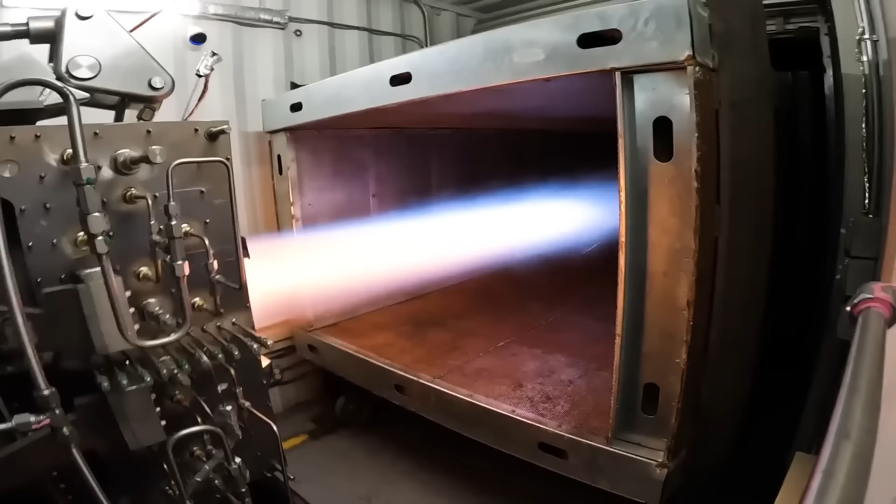Hello, is that a working turbo ramjet engine? You have my attention. So I reached back out to Hermeus to take a behind-the-scenes look at what they're building, and honestly, I was blown away by a company that any aeronautical engineer would dream to work for. What I saw and heard changed me from a skeptic to an optimistic fan of the company.

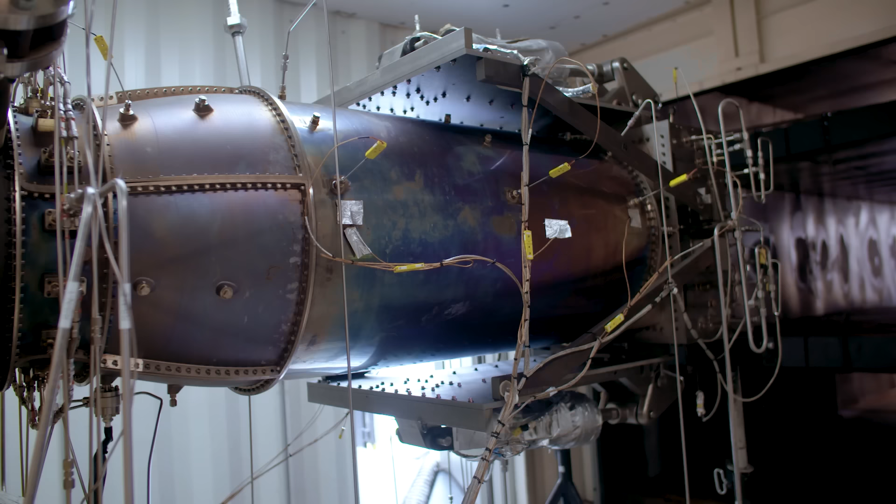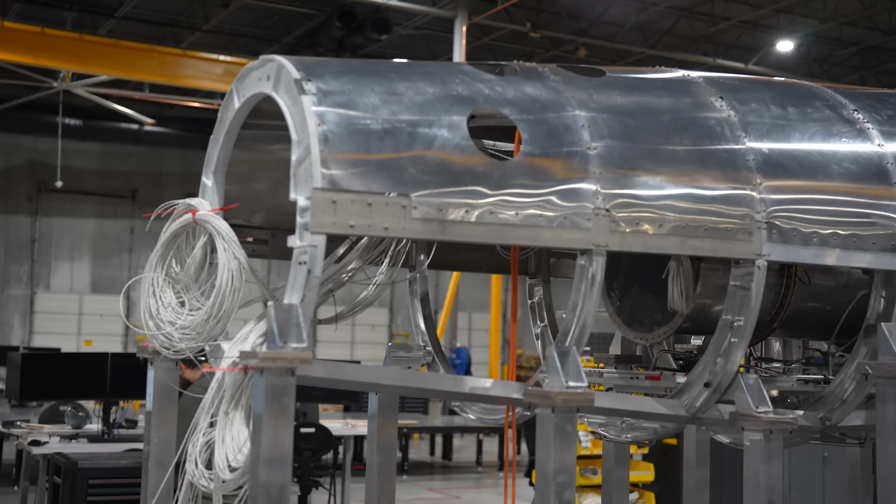A company that, according to their CEO, AJ Piplica, started with humble beginnings. Can you tell me what those early days were like when it was just the four of you, I don't know if you were literally in a basement? We were literally in my basement with our two dogs. It was really exciting. So when we left our relatively good paying jobs and decided to jump off a cliff and try to build an airplane together on the way down, we basically kind of gave ourselves and our family 6 months to figure it out, essentially starting from nothing.

Can this idea that we've got become a thing? Can we put together a plan that can get us to high-speed passenger travel in some reasonable period of time, reasonable 10-ish? Can we bring really strong people in to support that plan? Can we bring capital to support that plan? Can we bring customers? All of those questions we had to answer within 6 months.

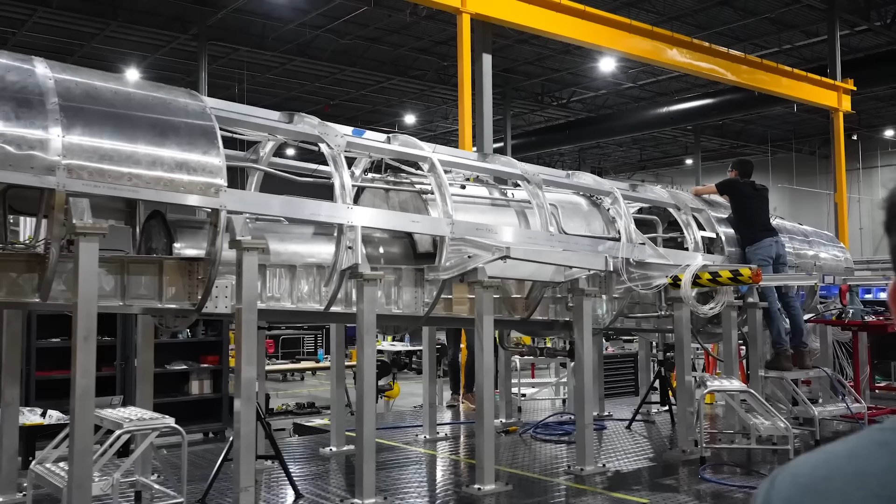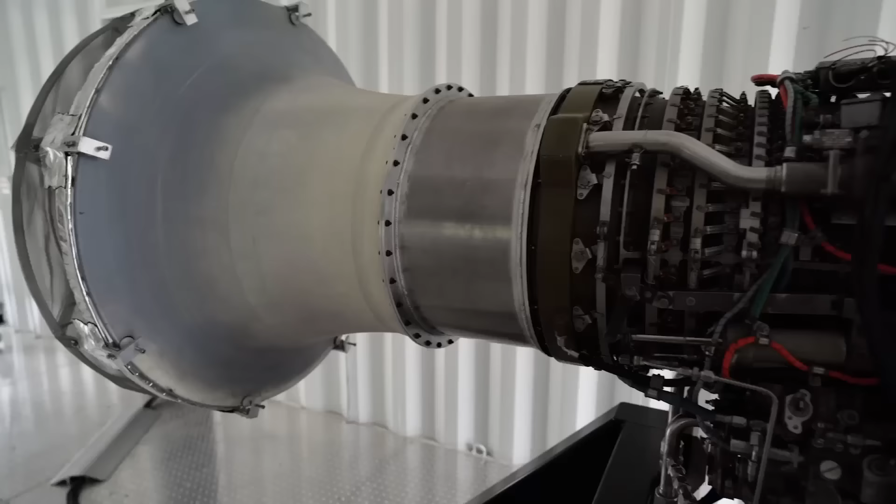Saying you are going to build a hypersonic plane is easy. Actually doing it is a completely different story. Software startups have a massive advantage in that they don't actually have to build anything. You can bootstrap a software startup with just a few talented and passionate founders in a garage. Hardware startups don't have it as easy, and it's why I didn't take Hermeus overly seriously until I saw they were actually building. Pretty renders of futuristic planes are a dime a dozen.

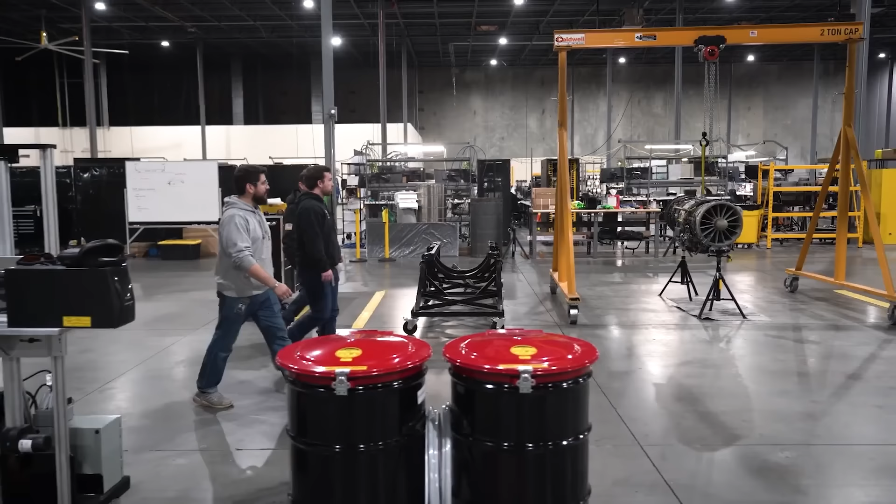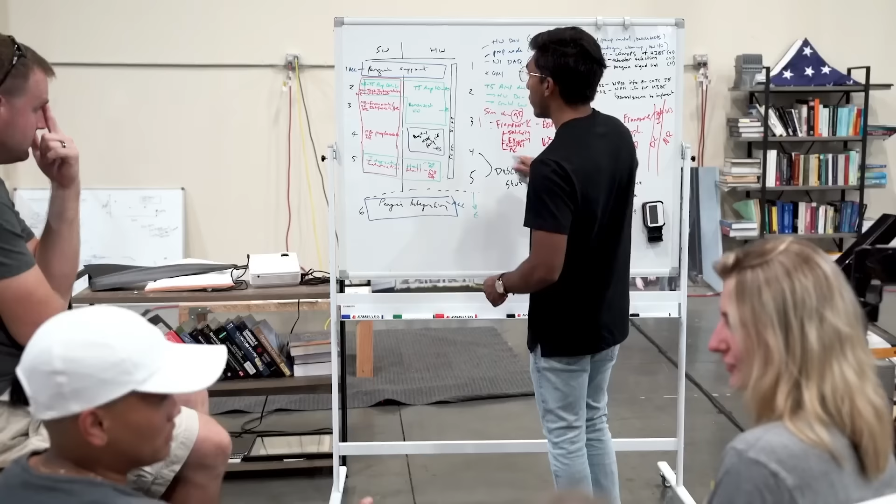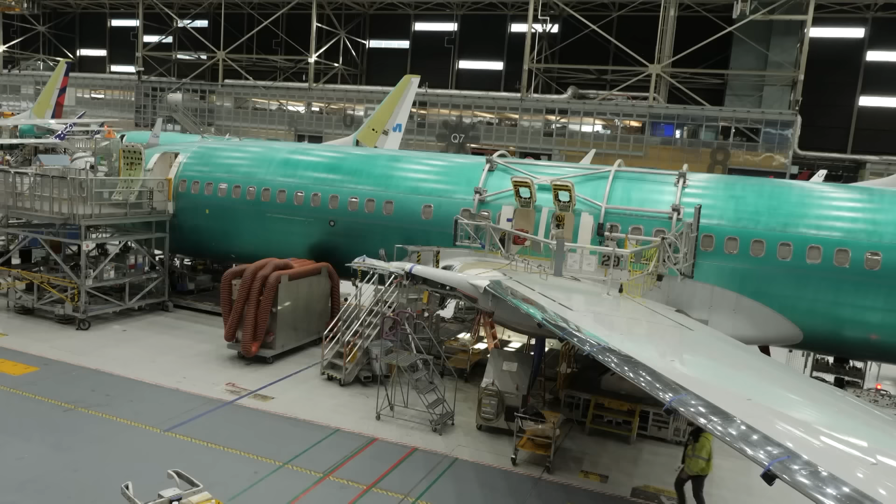Hardware startups are famously difficult to build. One of the first challenges is to demonstrate to investors that you have a clear path to revenue, and for that, you need customers. The path to selling planes in the commercial aviation industry is extremely tightly regulated. Even established multi-billion-dollar companies like Boeing have tried to skirt around certification steps when introducing new engines because it's so time-consuming and expensive.

Even government-backed ventures like the Concorde, which had a max speed of Mach 2, are no longer around. Even military-backed planes like the SR-71 and XB-70, with max speeds of just over Mach 3, are also no longer operational. Trying to go from nothing to a commercial hypersonic passenger plane with a max speed of Mach 5, with no intermediate revenue, is going to require some extremely patient and wealthy investors.

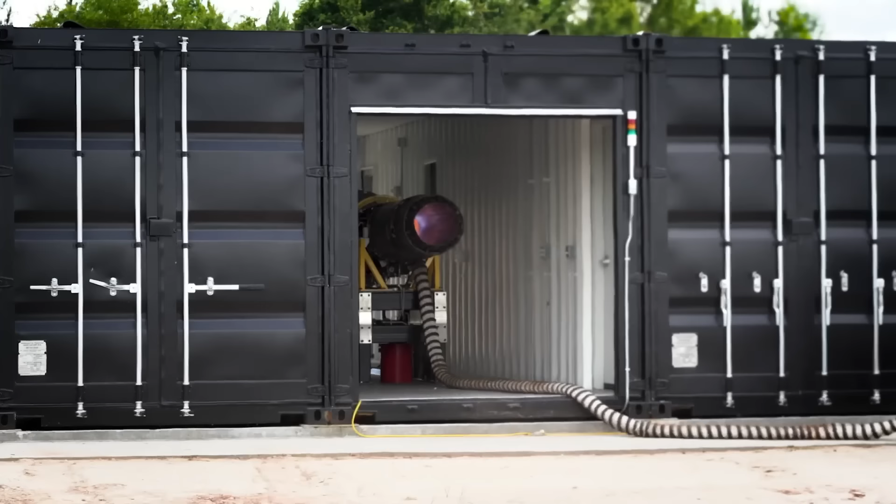However, Hermeus' founders, when they were conceiving the company in that basement, were well aware of this treacherous path to revenue. We knew from the very beginning, we couldn't just raise billions of dollars to go build a really fast passenger airplane. We knew that, just like SpaceX, all the steps of technology, de-risking, and development along the way, we needed to solve important problems for customers. So it took us a while to sort out, okay, those problems are in the national security space, and they are very, very important. And that was eventually the thing that I think really got us to the first round of funding, is kind of making that breakthrough of yes, there's this long commercial roadmap to fly passengers across the Atlantic Ocean, but the way you get there is by solving national security challenges.

So, Hermeus plans to solve problems in the national security space and generate revenue there first. So what are those national security concerns?

One of Hermeus' leading investors is the US Air Force, and hypersonic technologies are a hot-button topic in the defense industry right now. What were your most surprising findings on the threat environment, particularly with regard to China?

They're moving so fast, I think it's surprised us all. There's one other thing we should bear in mind, and that is that the things they're producing are very technical, very high quality. They're ahead of us, for example, in some of the space issues and with regard to some of these very, very fast hypersonic type weapons.

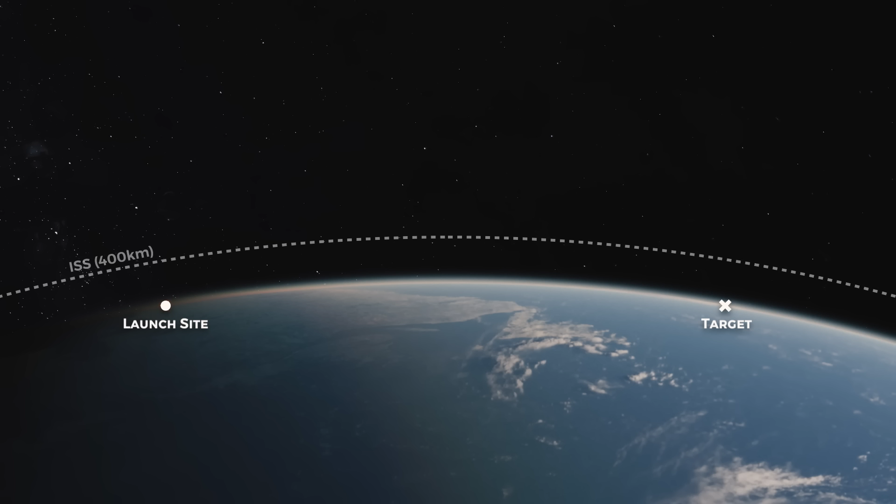Intercontinental ballistic missiles are designed to exit Earth's atmosphere, travel extremely quickly at speeds of up to 7.8 kilometers per second through space, and then suddenly dive on their targets. They move quickly, but their lofted trajectory gives their enemies more time to detect and aim anti-missile defenses.

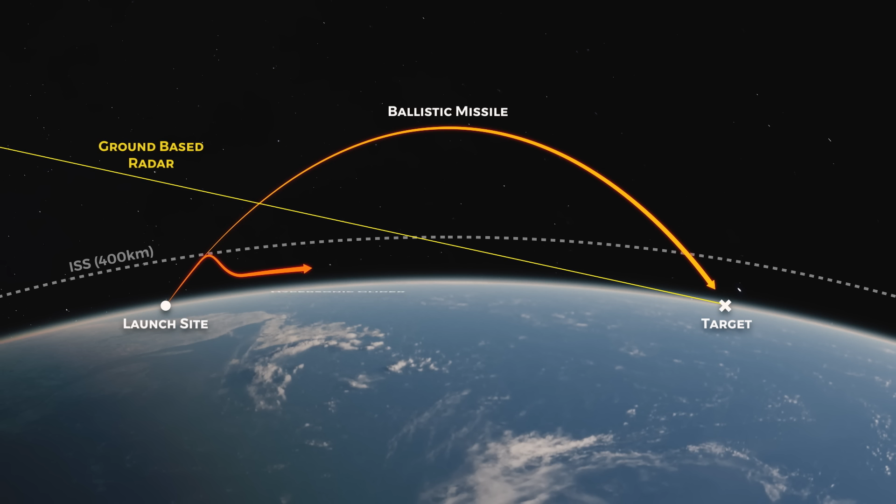Hypersonic missiles are designed to cruise within the Earth's atmosphere at about half the speed of an ICBM. The atmosphere slows them down, but their low trajectory means they suddenly appear on the horizon, previously being hidden by the Earth's curve, giving their targets minimal time to detect and intercept them.

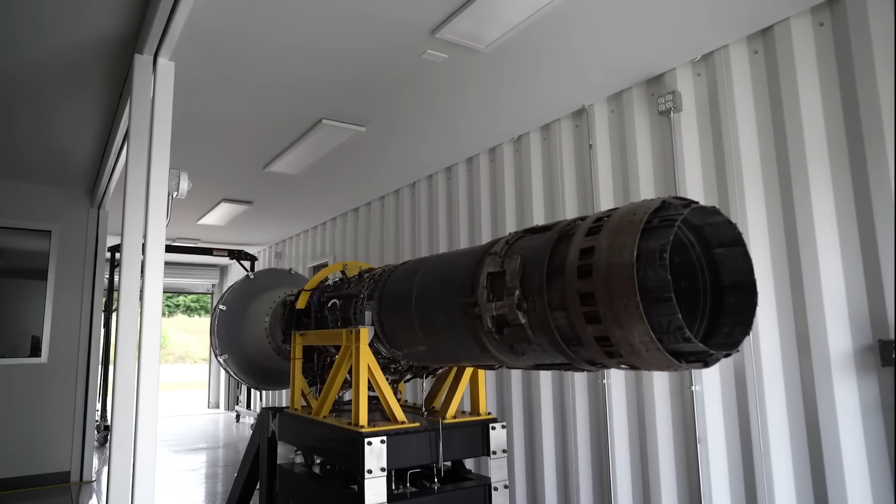This is the national security challenge Hermeus can help address, but not necessarily by building those weapons. One of the major challenges in developing hypersonic technologies is in testing.

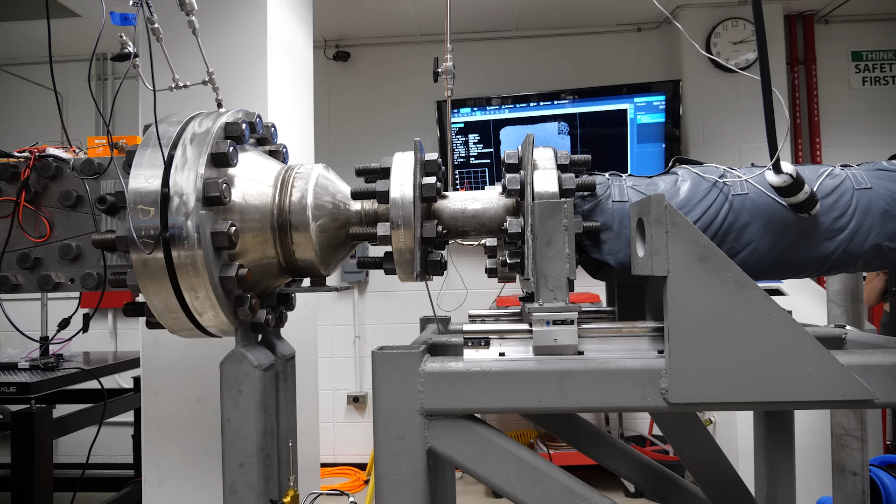We visited the hypersonic wind tunnel at UTSA last year to meet with Dr. Chris Combs to make a U-Haul go hypersonic just for the laugh. And while we were there, we asked about his perspective on Hermeus.

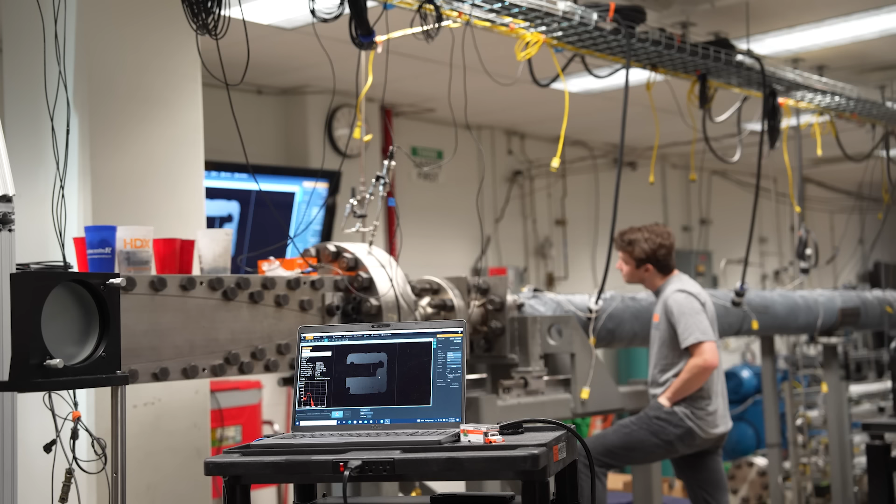One of the things I thought was interesting that their CEO said was it would be cheaper to build an airframe and make a hole in the desert than to test this in a hypersonic wind tunnel. How much truth is there to that?

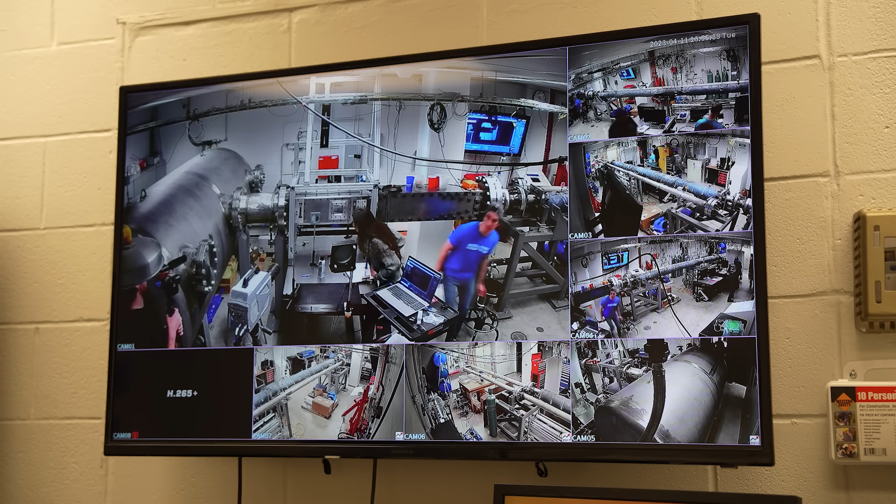So there's a broad spectrum of tests. On the hypersonic wind tunnel side, even, there's facilities like ours where the costs are relatively low, but the scale is smaller and the flight temperatures are low. So there's certain types of facilities where you can run for relatively low cost, where that statement about a wind tunnel test being more expensive than a flight scale test wouldn't necessarily be true.

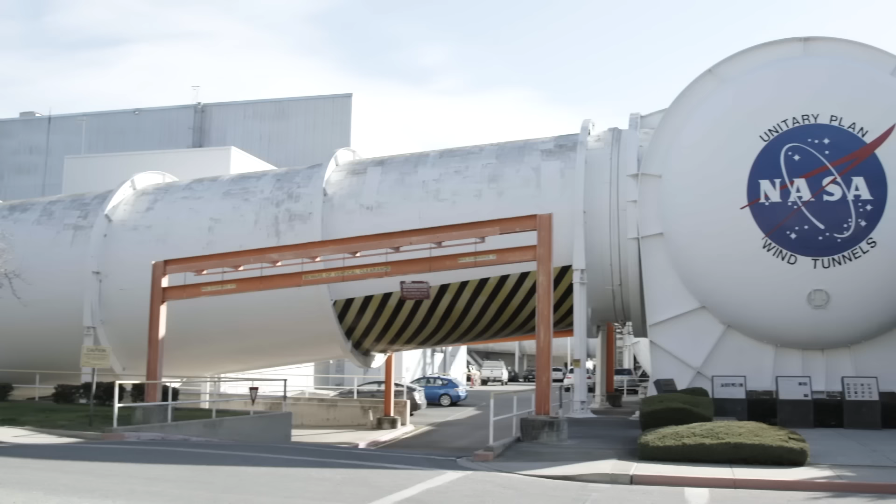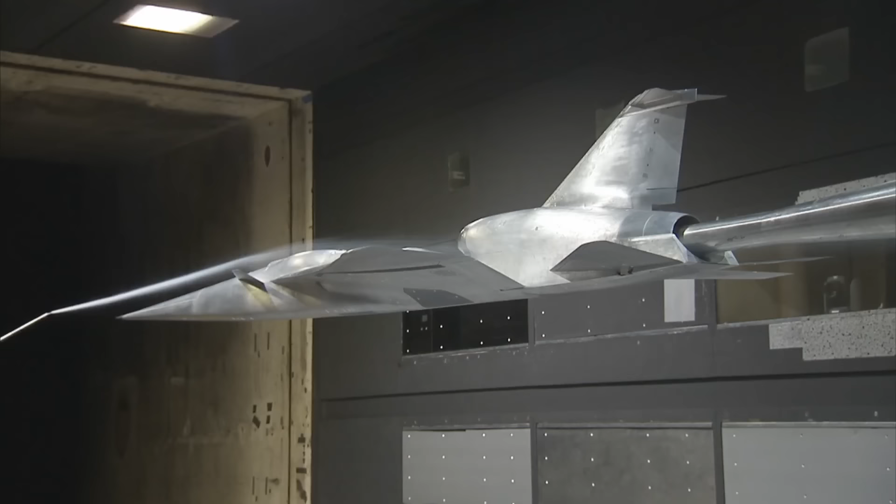But on the other end, if you go into one of the large scale DoD production wind tunnels, or at a NASA facility where you could maybe start to approach something at scale, yeah, that might be the case. You might be looking at hundreds of thousands of dollars to $1 million a day or a week to test, which kind of depends on how you set things up.

A cheap sounding rocket test would probably be about $10 million. And so we're not talking about a flight test, we're still talking about scale. So it really depends on how big is the thing you're trying to test. Are you trying to test the actual vehicle or not? What type of wind tunnel conditions do you need?

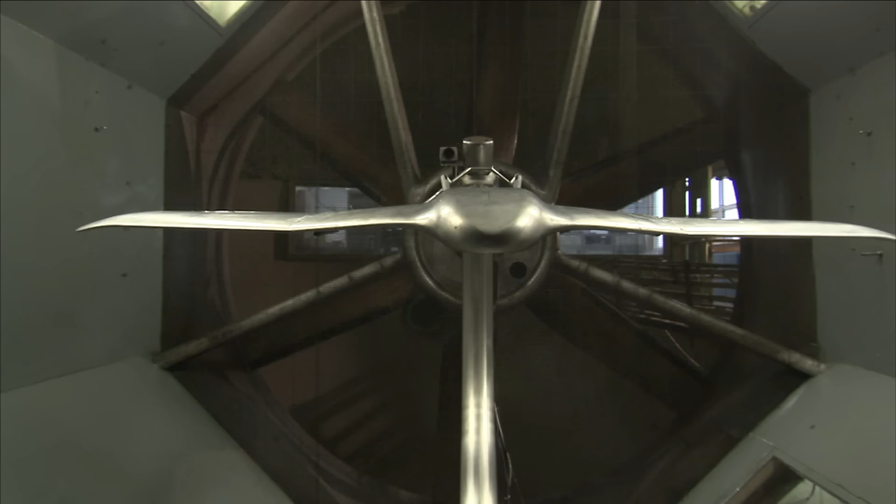There's a bunch of variables there, but at the end of the day, if you wanted to do a full-scale vehicle, fully integrated, there's not a facility in the world where you can actually do that on the ground, so flight test does become your only option.

And that's the first market Hermeus is planning to attack: real-world flight testing. That's what Hermeus' first aircraft, Quarterhorse, will provide. It will be a reusable hypersonic testbed, providing flight testing services for companies seeking to validate hypersonic designs.

It will be an autonomous hypersonic aircraft that will not just provide Hermeus with valuable lessons in developing a hypersonic vehicle, but also provide them their first revenue source, competing with the likes of those $10 million sounding rockets, while being able to provide much more data, as rockets can only fly through the desired flight regime for a very short time as they ascend through the atmosphere.

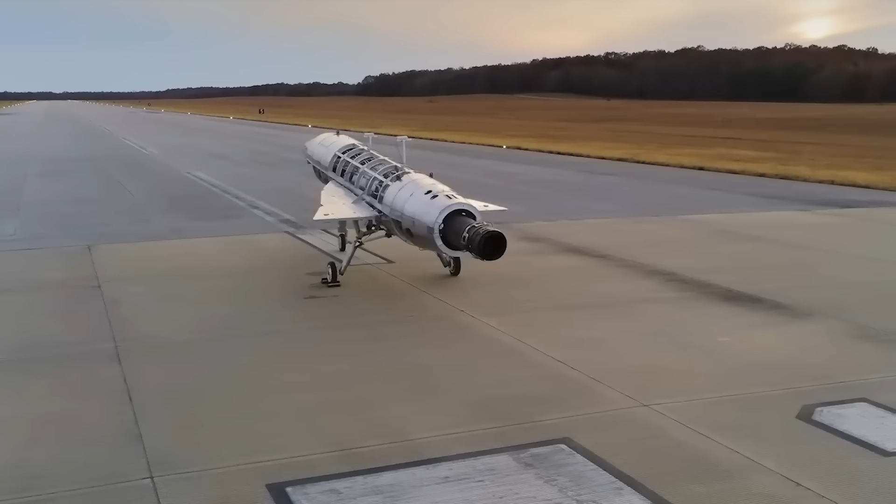This is a valuable market, with deep-pocketed clients like the US Air Force, NASA, and even SpaceX, helping bridge that revenue gap to their final goal of a commercial passenger aircraft and gaining the confidence of investors.

In April 2021, Hermeus received a $60 million jointly funded contract from the US Air Force, and in March 2022, they secured $100 million of Series B funding with OpenAI founder Sam Altman as the lead investor. With this money, they have been busy working on the next critical step in developing a hypersonic plane: the engine.

Boom, the commercial supersonic aircraft startup, suffered a massive setback when Rolls-Royce decided that the commercial supersonic market was no longer a priority and pulled out as an engine manufacturer, and have since had to scramble to develop their own engine, the Boom Symphony.

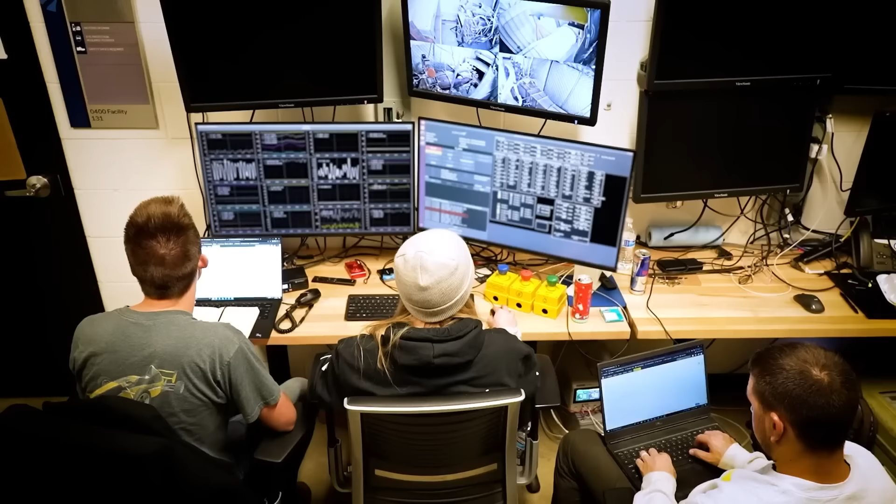Hermeus wisely skipped the step of relying on a third party to solve their engine needs. Their first goal with that early seed money was to develop their own subscale turbo ramjet engine.

Skyler Shuford, Hermeus' chief operating officer, gave me a tour of their very first engine. So this was our humble beginnings, the first engine subscale demonstrator that we made.

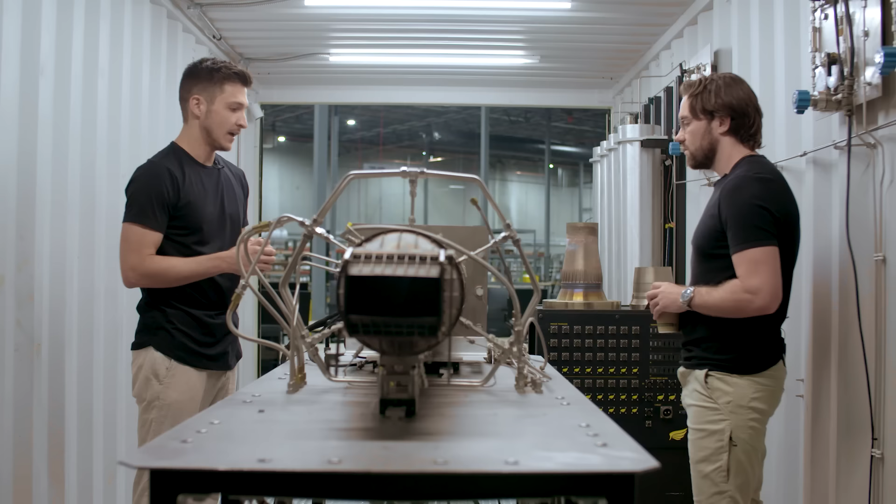Just to take a step back, our engine architecture is a jet engine at low speed, just an off-the-shelf jet engine, which is this section here. And then we wrap the high-speed bits around it. So everything from here back is all custom, mostly 3D printed, but could have been traditionally manufactured as well.

So this is our shared afterburner ramjet combustor. And then up front, we have our pre-cooler, obviously ground scale hardware, pretty battleship, rugged scale hardware. But the pre-cooler is what allows the jet engine to get up to the point where the ramjet can then take over.

Okay, let's pause there for one second, because I want this video to be as accessible as possible for people who aren't experts in ramjets or pre-coolers or afterburners or whatever the hell battleship rugged scale hardware means.

By that, Skyler means the prototype engines, which aren't intended to fly, are not built with low weight in mind. They are rugged and reliable. They use cheaper off-the-shelf components where possible. They are technology demonstrators, intended for rapid iteration. Spending a lot of time optimizing for weight and other characteristics doesn't make sense this early in the process. So, if they can use a cheaper actuator designed for a battleship instead of spending an extra few thousand dollars on a specialized actuator intended for something like an SR-71, they will.

Next, what even are ramjets?

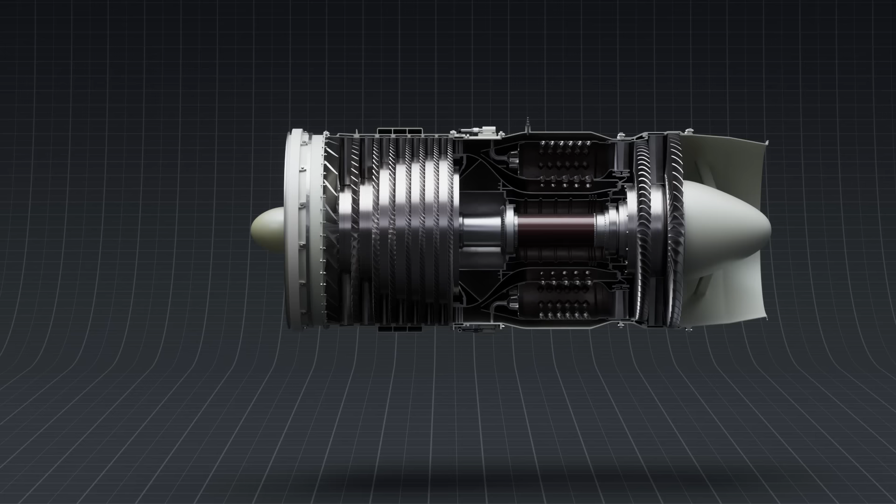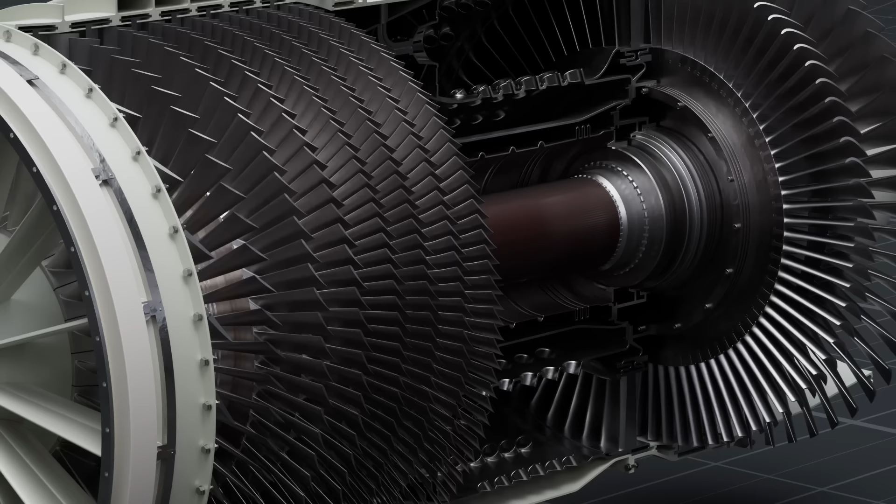To understand that, we first need to understand what causes normal jet engines to have a physical speed limit. Jet engines need to compress air before it enters the combustion chamber in order to extract as much energy as possible from the fuel. A normal jet engine does this with the compressor section, where air enters the engine and is squeezed down into a smaller volume by the compressor blades. The compressor is driven by the turbines, which extract some of the energy released in the combustion chamber to drive the compression stage. This type of engine has a speed limit because of all of those moving, rotating parts.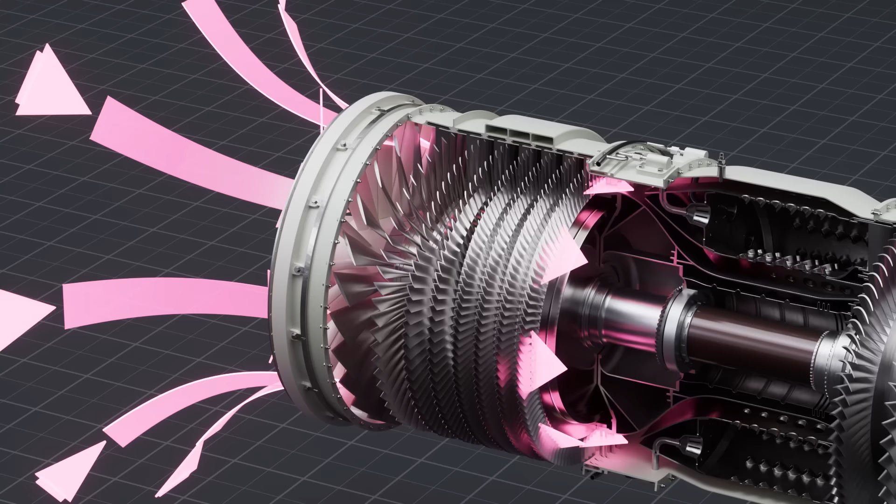As the speed of the aircraft increases, the incoming air is compressed more and more as it's forced down the inlet of the engine, which results in ever-increasing temperatures, which can eventually exceed the material limits of the compressor and turbine blades.

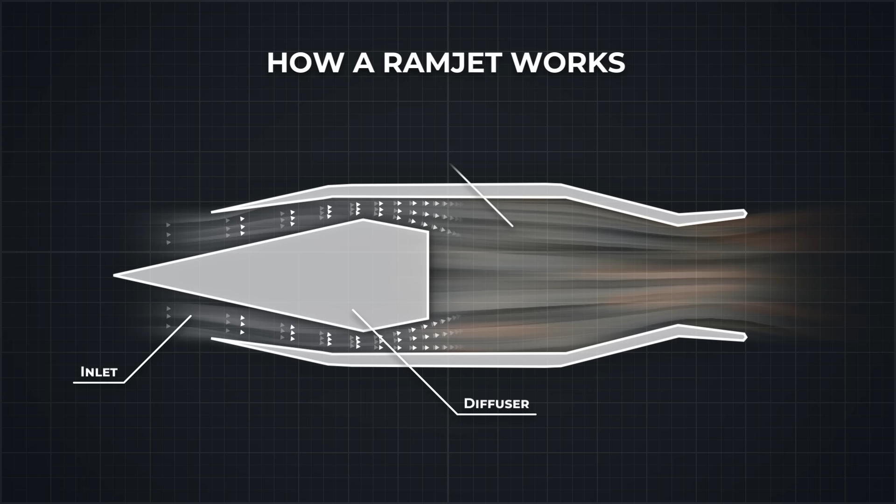Ramjets get around this by using the forward motion of the plane to ram air directly into the combustion chamber, so we don't need any of the compressors or turbines at all. The forward motion of the plane provides enough compression alone.

However, it's not quite that easy. The plane needs to be traveling fast enough to achieve the necessary compression for combustion. A pure ramjet needs some other method to get up to speed, like being dropped from another aircraft.

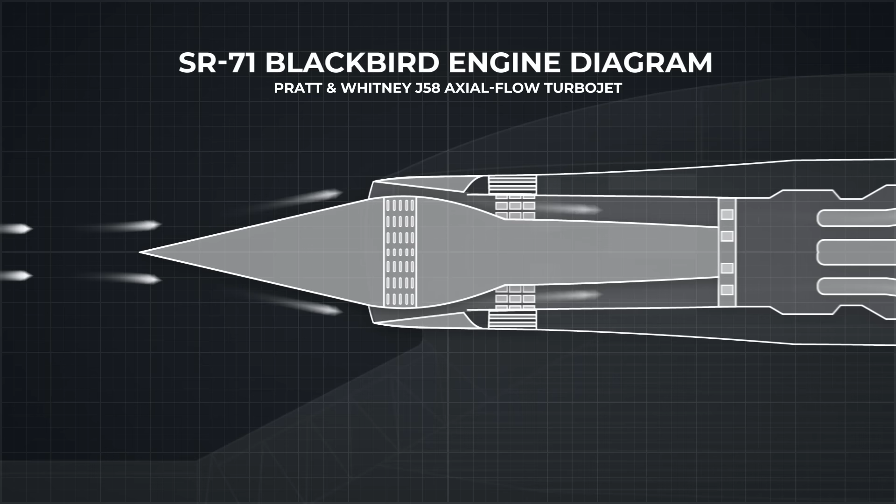However, we can create a hybrid engine, a turbo ramjet engine, the same kind of engine the SR-71 used. It used a conventional jet engine with an afterburner, which is simply an additional fuel injector at the outlet of the turbine to provide additional thrust, basically an air-breathing rocket nozzle. It used this to get up to speed, and then once going fast enough, air was channeled around the compressor and turbine section and dumped directly into the afterburner and began operating as a ramjet.

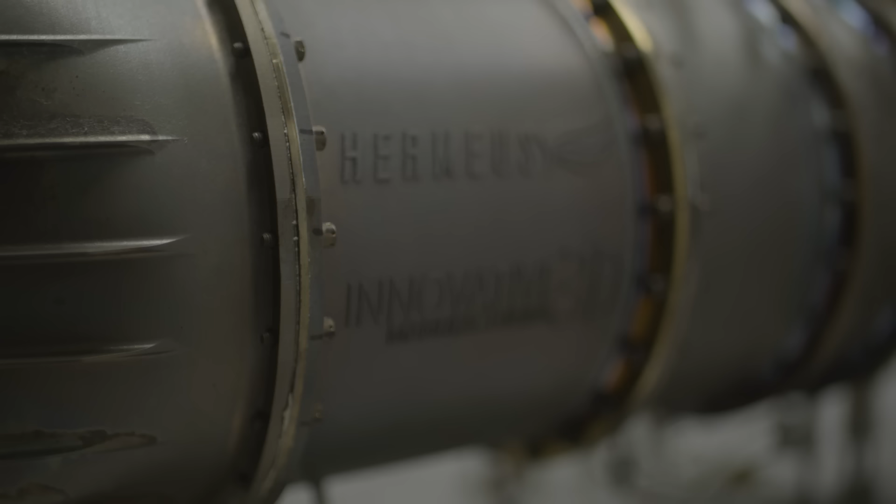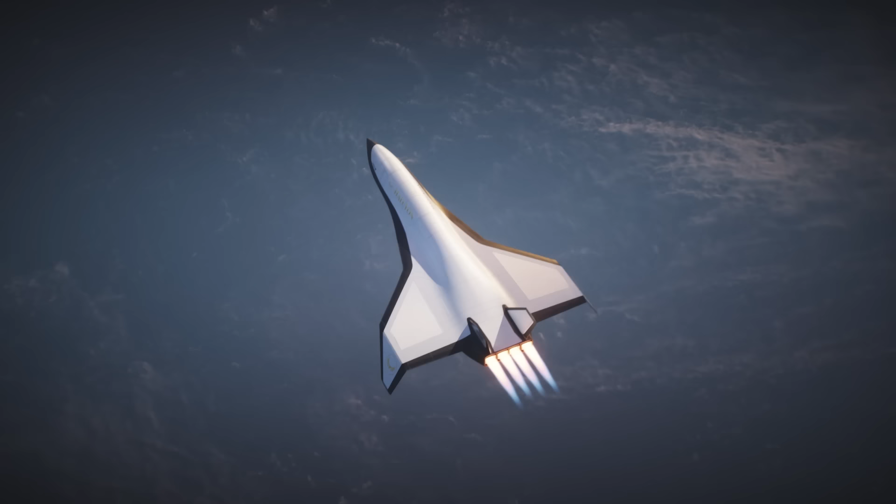This is similar to what Hermeus has built, and there have been plenty of problems to solve along the way. Making the transition between turbojet and ramjet engine is not easy. It's not an instant switch. Several things need to happen as the engine transitions from turbojet to ramjet, and in that time, the aircraft is going to be rapidly decelerating as drag acts on the supersonic aircraft. If this transition isn't fast enough, the plane could end up not having enough speed to light up the ramjet.

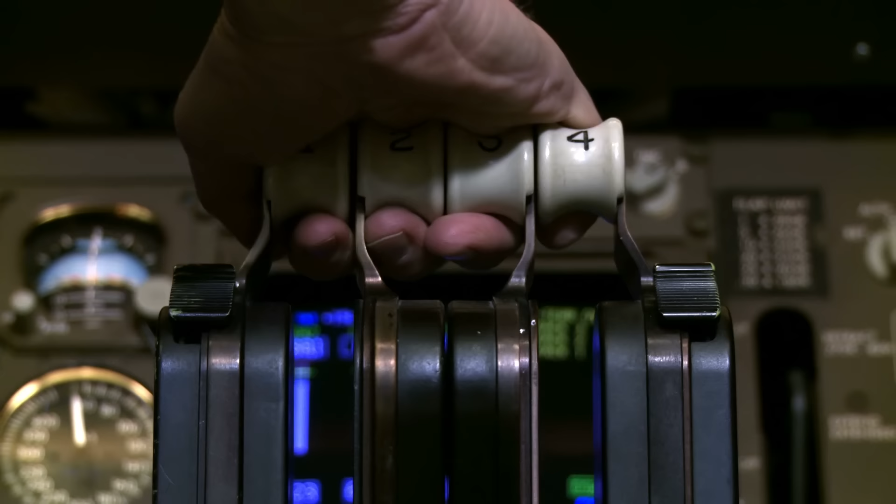Or, for a passenger plane, the sudden deceleration could just be jarring. A lot of first-time flyers find the sinking feeling of an airliner decreasing thrust after takeoff a little disconcerting.

Imagine that, but on steroids. To ease the transition, we need to push the turbojet to its limit, getting as fast as possible before mode switching. To help with this, Hermeus have installed a pre-cooler, something the SR-71 did not have. This cools the incoming air and allows the turbojet engine to operate at much faster velocities before the blades reach their max operating temperature.

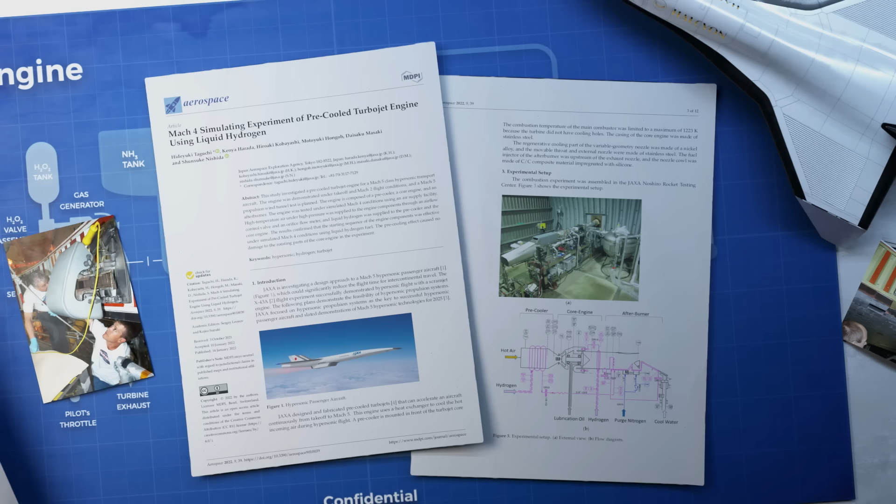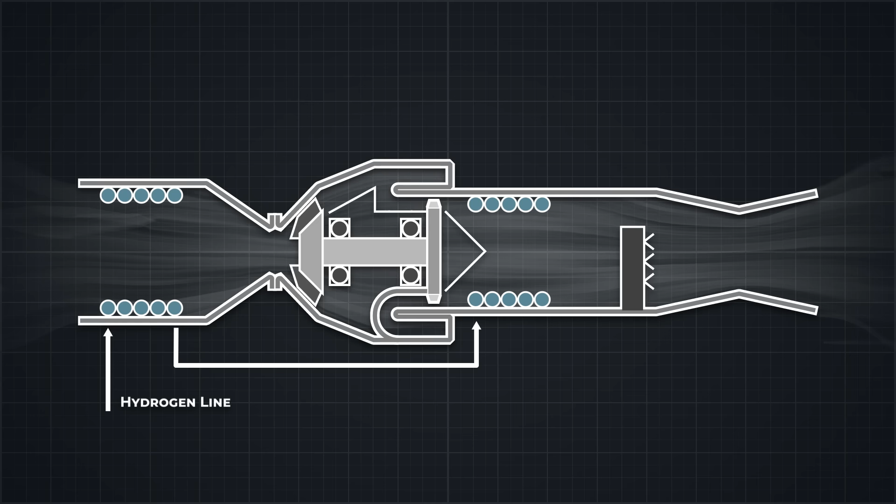An engine created by the Japanese Institute of Space and Astronautical Science used a liquid hydrogen pre-cooler placed in the inlet of the jet engine, in front of the air intake spike. The liquid hydrogen then travels through the inlet nozzle and combustion chamber, where it absorbs heat and turns into high-pressure gas. This high-pressure hydrogen is then injected into the combustion chamber as a fuel source.

The details of Hermeus' pre-cooler are secret, but they are using a pre-cooler to push their off-the-shelf jet engine to extremes. So that's what we did here.

So we took an off-the-shelf jet engine, designed to about Mach 0.8. Using our pre-cooler, we pushed it up to about Mach 3.3 conditions, so around where the SR-71 flew in terms of temperatures. So it was about 800 F air coming in, and we cooled it down to about 150 F. The jet engine had no problem. And all of this hardware, our afterburner combustor, was running during that whole operation.

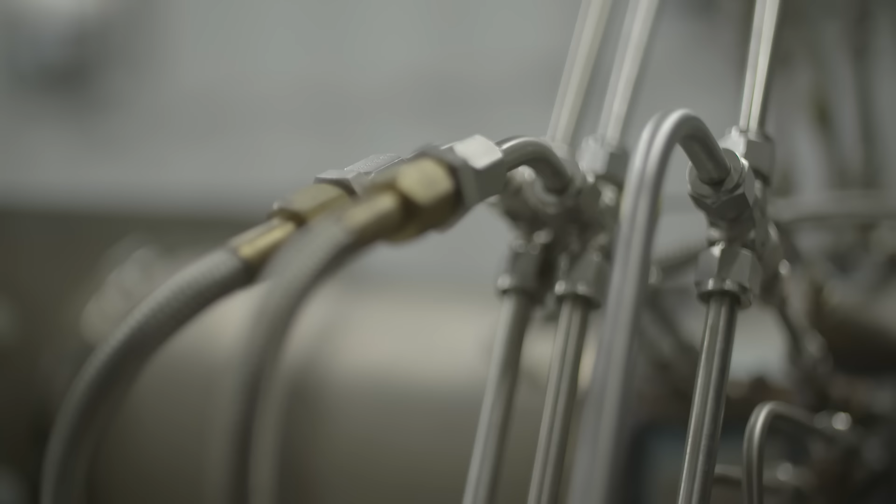And then we pulled this out and connected the ramjet combustor directly to the facility and started it at about Mach 2.8. What do you mean by the facility?

So to be able to test the temperatures and the flow rates associated with high-speed flight, you could do it a couple of different ways. There's full tip-to-tail free jet testing, where all of the flow is coming in at high Mach conditions. But for us, because everything internally is all subsonic, we can do direct connect, so it's not flowing high speed around, it's just flowing directly into the engine.

We did that testing up at Purdue University, and they were able to provide the high temperature air associated with high-speed flight. Is it just high temperature, or is it high velocity as well? So, like I said, everything after the normal shock is all subsonic, so it doesn't have to be high speed. Now, it does create a little bit of risk because you're decoupling the supersonic inlet from the subsonic flow path, but that's how we were able to do it.

So we did all of this with a team of 8 people in 9 months for $1.5 million. Yes, you heard that right. They've developed a functional turbo ramjet engine with just $1.5 million.

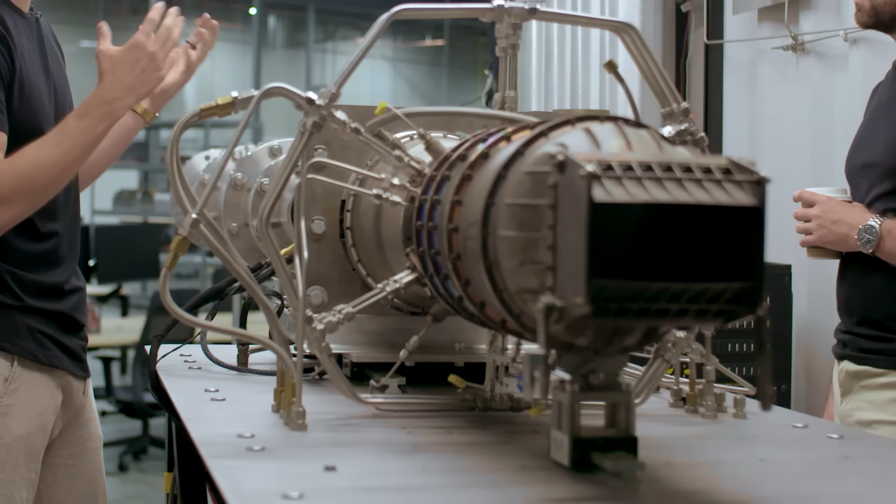But of course, this is just a subscale model. It isn't intended for flight, it's a proof of concept. But they haven't stopped there. Once this concept was proven, they moved on to developing Chimera, the engine that will be used in Quarterhorse.

We took a quick drive from Hermeus' factory over to their test facility at a local airport, where I witnessed a test of Chimera.

Throttle to 50. Throttling to 50. If you can't tell by the big, stupid grin on my face, I was having a great time. It felt like the entire test building was trying to take off.

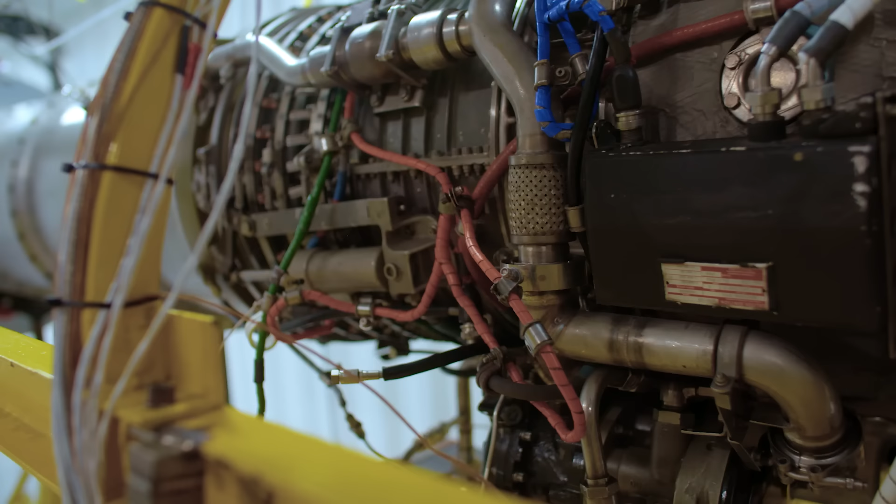This was a test of their in-house afterburner, which will be used as the ramjet after transition. After the debrief, Skylar gave me a tour of the modified General Electric J85 engine, the same engine used in the Northrop F5.

As with the other subscale engine, we have the J85 core, the turbo machinery core right here. And then everything from this spot back is all of our custom hardware. So obviously these valves are battleship valves, they're not gonna be something that we fly. It's gonna be a lot bigger, but we're really focusing on the core pieces here that we need to test on the ground, and so that's what this configuration is.

So everything currently, the designs are being flight weighted, but even this we're using as a test bed and iterating a lot on. The hardware that's inside of here went in like 2 weeks ago, and that's what the team has been working on, expanding design modifications for life, for endurance, for performance. So we can use this as a test bench to rapidly turn through things, 3D print some stuff, traditionally manufacture some stuff, and then get the performance and duration out of this set of hardware.

With these valves, are they inlet valves, or what are they? Yeah, so these valves represent some of the pressure differential blow-off we'll need for the 2-mode operation. They're kind of a bypass. Exactly, so when we transition from turbojet to ramjet, a set of valves moves some of the internal systems around via pressure, and this is the ground representation of those.

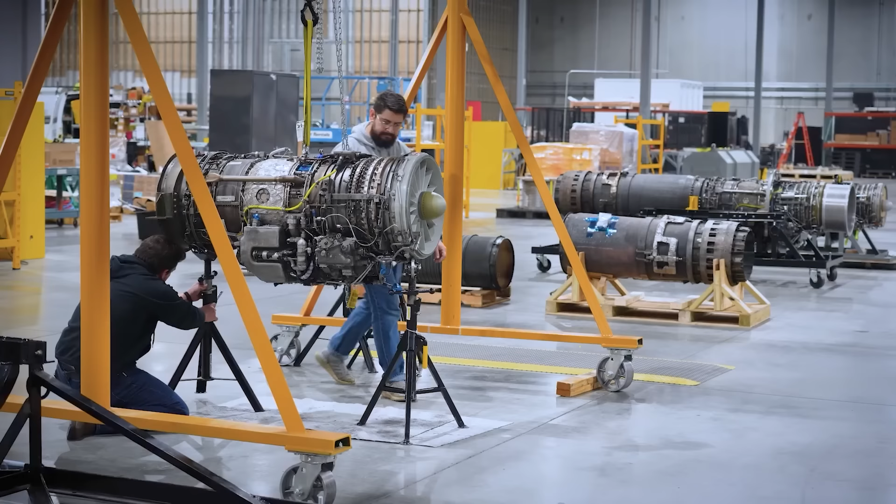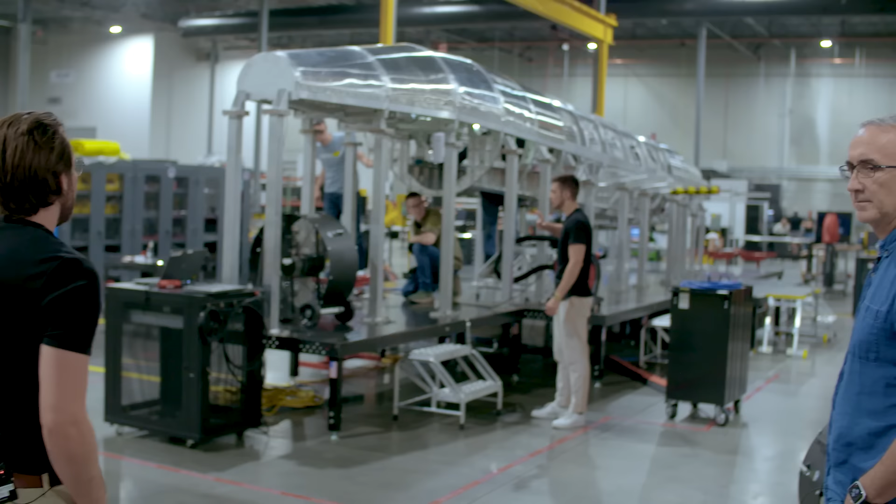So it seems Hermeus are well on their way with the development of their ramjet engines, with both the J85 and much larger F100 versions being actively worked on. So what's next for Hermeus? Well, they just tested Quarterhorse Mark 0, the ground vehicle we saw being constructed in the factory. This vehicle was intended to help Hermeus develop their in-house manufacturing techniques. A lot has changed since the days of the SR-71, and this has unlocked many manufacturing techniques that the engineers of the 1960s could only have dreamed of, like large format 3D printing.

So we're also investigating large format additive. That other process was very fine, very precise, but with large format additive, you can deposit a lot more material and build larger structures a lot faster. So the resolution is a bit worse, but you can put down a lot of material and build large structures.

There's no real grain on it, has that been processed to polish? So it's like a weld process, so you have pretty consistent material properties throughout. And that's what we're looking to quantify and get very precise on. What material is that? This is Inconel as well. It's so much heavier than I was expecting. Yeah, it is. Just steel? Yeah, it's just steel, but it's high nickel steel.

It's just one of those things you read about constantly but never actually hold. In my head, I was thinking it would be closer to titanium. But yeah, no, it's just heavy. It's heavy.

It's kind of less exciting too when you're actually looking at it. I mean, I'm just nerdy about this sort of stuff. This is where I get properly excited. Material science, I just think it's so cool.

There's some voids in there. This is like a very large weld process. Wire comes in, big laser, and you can deposit a lot of wire. That's what's actually in here. You can kind of see the robot arm that prints it.

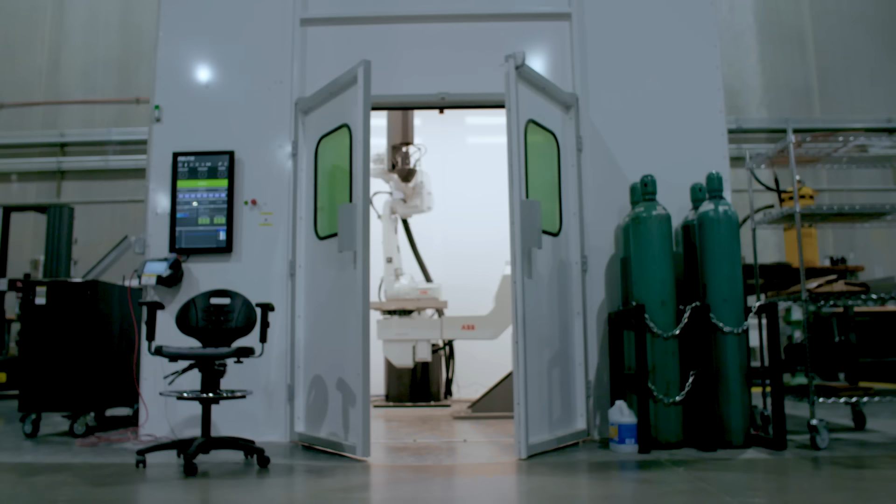So it's not active right now, but you can kind of see the laser arm. At this point in the tour, extremely loud, high-pitched grinding started, which is a common theme on these documentary shoots, so I'm going to save your ears and explain the rest in voiceover here.

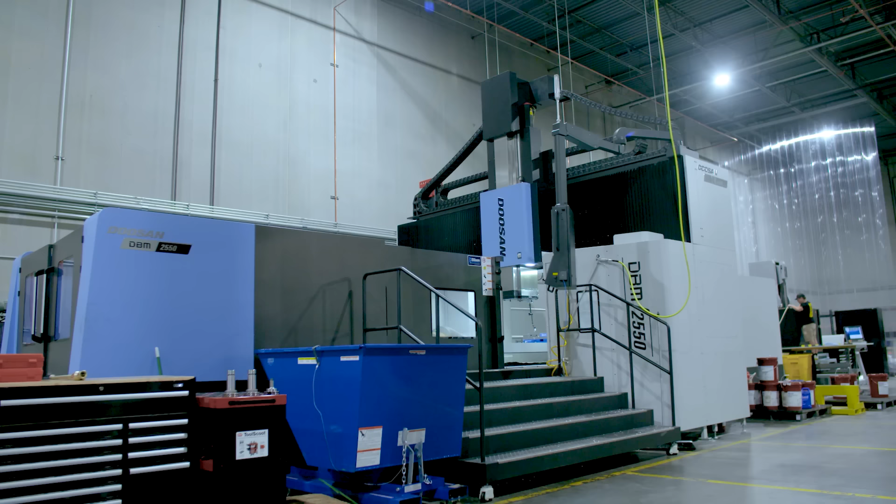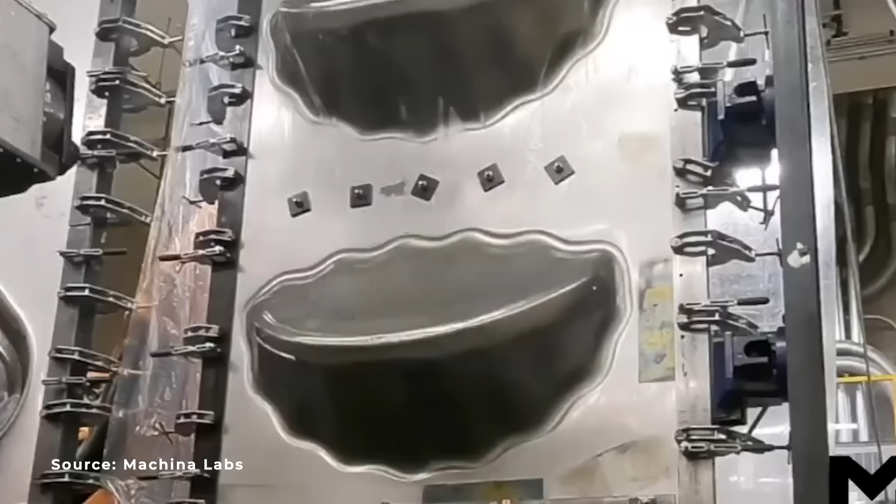Hermeus have been manufacturing much of Quarterhorse Mark 0 in-house using a mixture of small and large format 3D printing and an absolutely massive CNC machine. However, one of the most exciting manufacturing techniques that Hermeus mentioned was with Machina Labs' new AI-driven robots, a robotic panel forming process that could form the outer skin panels of the planes.

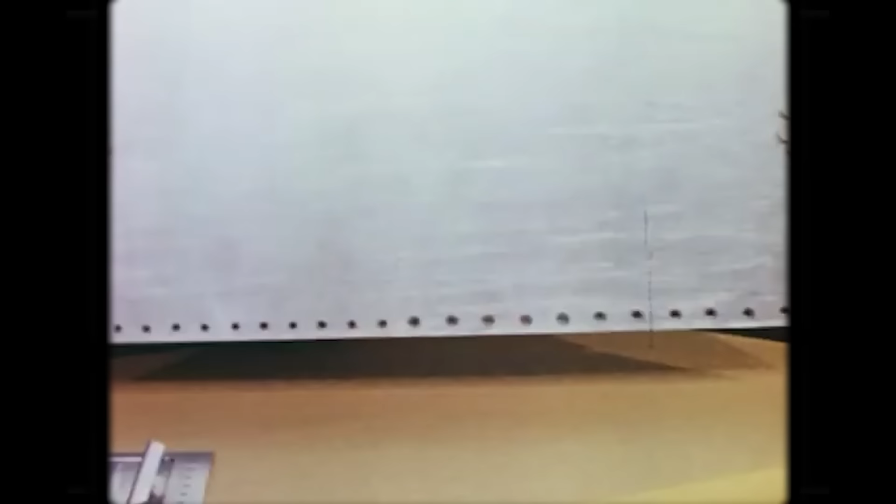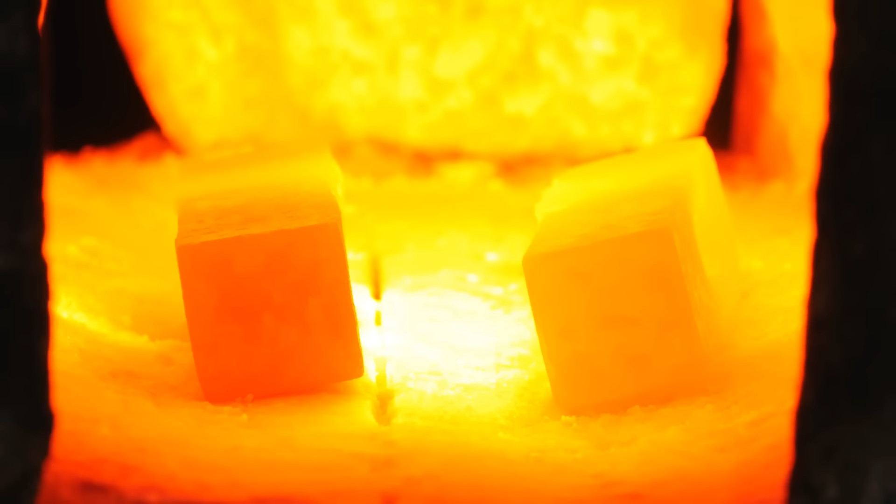This technology could drastically decrease the cost of development. Body panels in automotive and aviation industries are frequently manufactured by huge hydraulic presses that force sheet metal into a mold. These molds are expensive to make, and making small adjustments to a design often requires making an entirely new mold. This is also even more difficult with high-temperature alloys like titanium and Inconel, something the engineers of the SR-71 seriously struggled with.

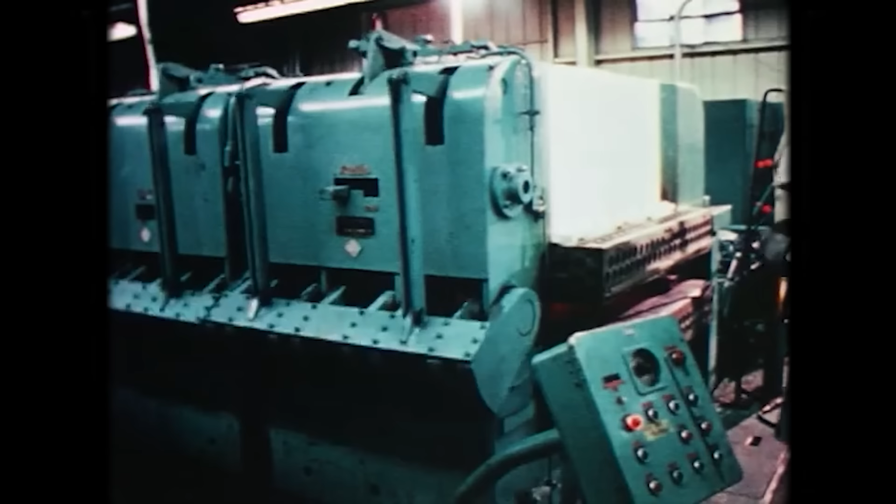The US didn't even have hydraulic presses with enough pressure to form the panels. The best forge in the United States at that time could only produce 20% of the pressure needed to form these titanium parts. Clarence L. Johnson, the manager of Skunk Works at that time, pleaded for the development of an adequate forging press, which he stated would need to be a

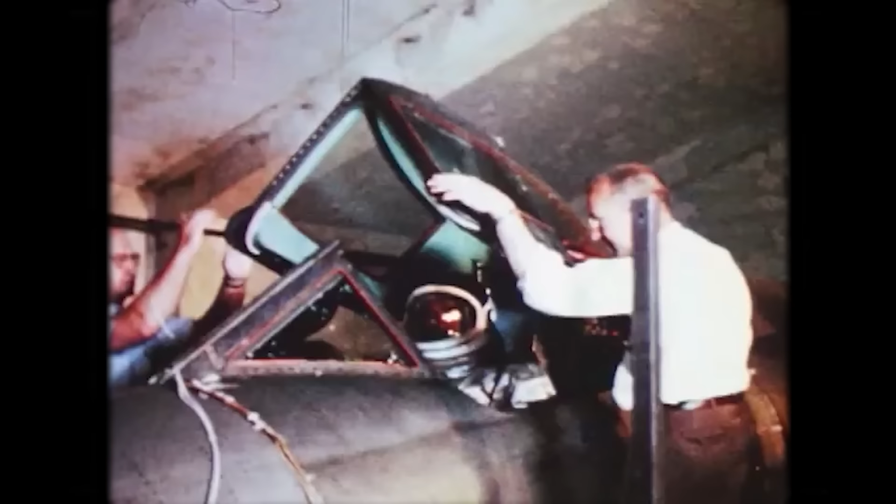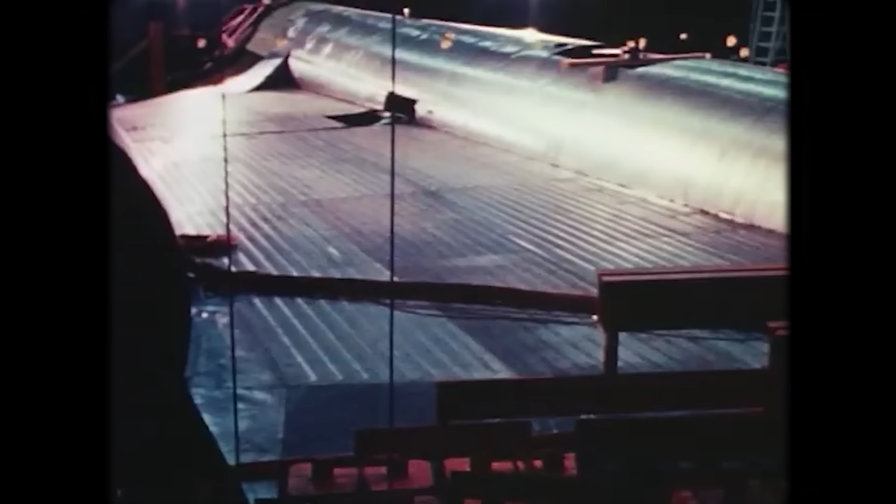250,000-ton metal forming press. Because of these inadequacies in forming capabilities, the final forging dimensions were nowhere near the design dimensions, and much of the forming process had to be completed through machining, meaning most of the material was cut away to form the part, resulting in 90% of the material going to waste. When your raw material is extremely difficult to refine, like titanium, these kind of wastes really hurt. This also makes design iteration extremely difficult.

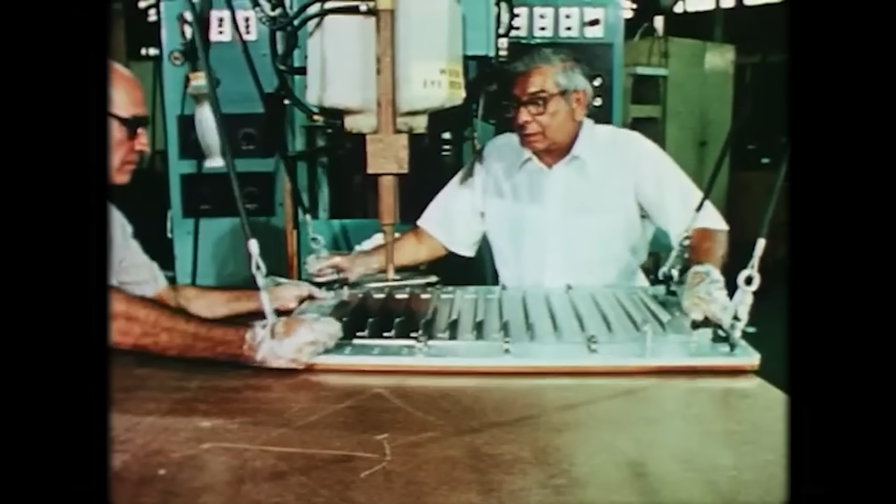But Machina Labs are already forming titanium and Inconel parts. This, to me, is a key enabling technology. But, of course, even the most advanced manufacturing techniques don't solve all of Hermeus' technological challenges, which is why Hermeus have limited themselves to Mach 5, the lower end of the hypersonic flight regime.

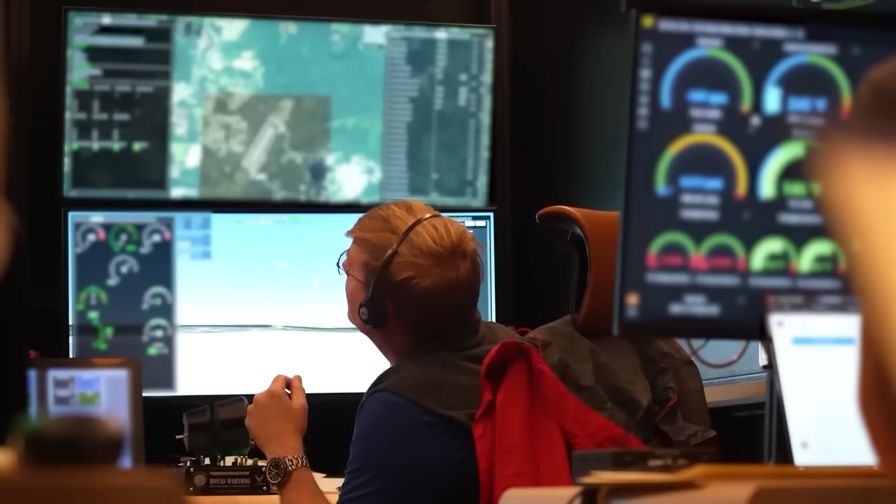And like you mentioned earlier, there was a specific reason why you're aiming for Mach 5 - what is the advantage there? Yeah, so we do get the hypersonic bump because most people say Mach 5 is where hypersonic takes over. But it's not really about the buzzword, although that does help sometimes get people excited or make them very skeptical sometimes too. It's really about that being where the technology cliff is.

So on the engine side, it's where you can use ramjets rather than scramjets. About Mach 5.5 is where you have to go to scram because your performance losses caused by the normal shock become too much to have net thrust going forward. And then on the materials side, the temperatures that the gross acreage sit at are in a place where metallics can still work.

What does that mean, gross acreage? Yeah, the primary structure. So the primary structure at about Mach 5 sits at 800 or 900 degrees versus the 1900 degree leading edge. Right, okay. And so that means that we can use metallics for the primary structure versus ceramics that are still kind of in the development phase or the early researchy phase.

So we want stuff that can be produced at scale and is relatively available, and that is kind of the cliff. We're really at the very, very low end of hypersonic. When people hear hypersonic, they think it could be up to Mach 25. No, we're barely hypersonic.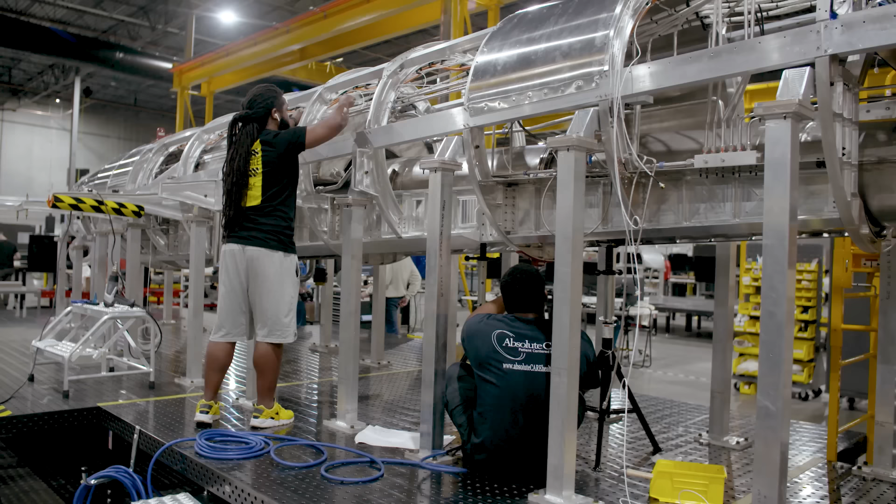So you're just going bare metal for the actual skin of the plane. There's going to be some judicious use of ceramics in places you might imagine, but for most of it, we can stick with off-the-shelf metallics.

And what's the reusability like there? Is Inconel fine for going through those thermal cycles? It's definitely going to be a challenge, and part of the work is to be very incremental about that. Our first vehicles are not going to have much life at all. Really, it's about accessing these flight conditions and starting to test at them. The later vehicles will start to solve it.

You almost have to re-educate people around the life of the vehicles, because most airliners or aircraft think about life as time under wing—hours of engine operation, hours of flight. That's a horrible metric for us because you're not in the air that long. It's really about cycles. Thermal cycles are going to drive the life of these vehicles. To be honest, we just need more data to anchor the long-term maintenance, repair, and overhaul models for these things.

Could you see yourself using ablatives—would they even work at Mach 5 if you needed it? It's definitely possible, it definitely works. But for the long-term vision of aircraft-like operations—because they are aircraft—you have to use things that don't ablate, or else you're replacing them every time.

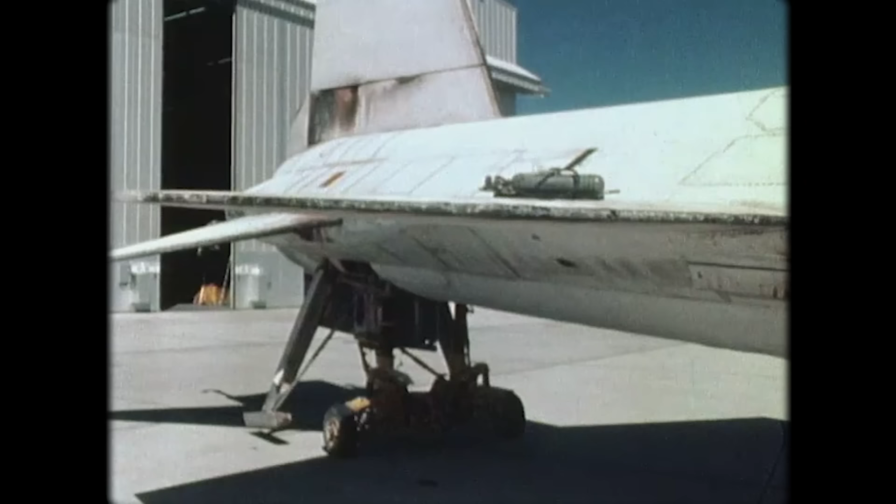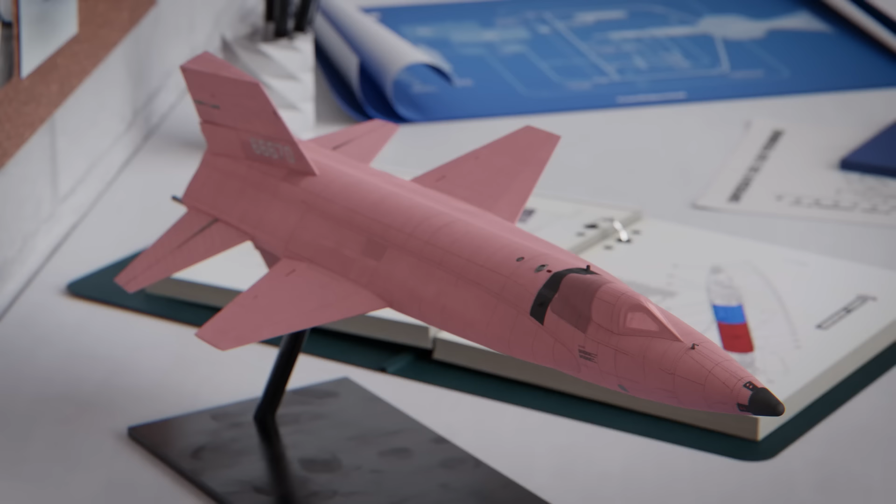The X-15 had a lot of issues with the ablative sticking to windows and things. That was when they started pushing the flight condition up to Mach 6.5 toward 7. For the first vehicles, they just had straight raw Inconel on the outside, and that thing flew 199 times with half a dozen or so vehicles. So that was highly reusable for the first time they were even getting to these conditions with a human-rated craft—rocket-based, so a little different, but just an interesting point.

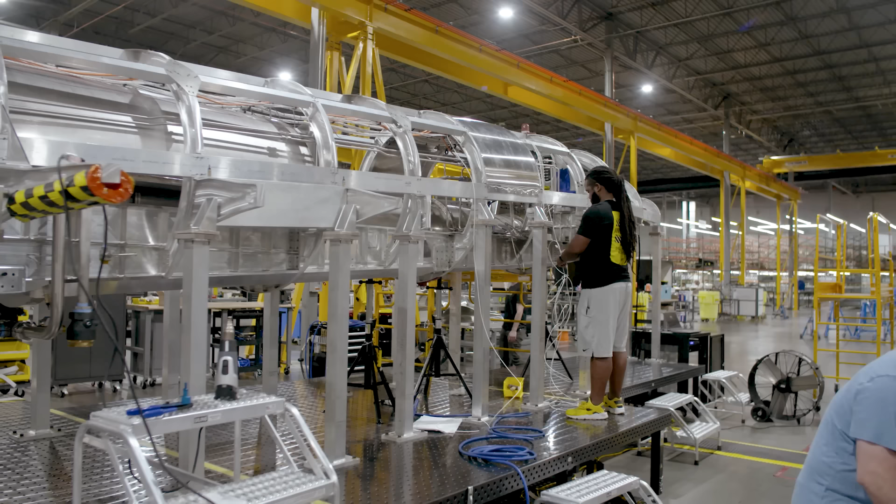For the start, slower speed—what's the biggest problem you've solved there so far? Have you had the opportunity to test the actual airframe and see what sort of issues you're going to have with that? Not yet, that's part of the work to be done. But there's a slew of other risks and problems we have to solve.

The engine was where we wanted to focus—you can't fly an aircraft without an engine. So that's where we started, and it's spent basically all of the time in the company up until this point. Now we're at a place where the major technical risk has been de-risked in terms of the mode transition, and now we're onto the airframe side.

Even just high-speed takeoff and landing of a remote piloted vehicle is a challenge. For a hypersonic vehicle, you want very short, stubby wings because you don't want to carry that drag into high speed. That's really bad for takeoff and landing, so you're having to thread three needles to have a vehicle that can traverse all of these flight conditions.

Takeoff and landing is one where you want really big wings and to go very slow—for us, we're not able to do that. By adding the speed component, the control system has to be tighter—all solvable, but not something we've done as an organization yet. So that's what we're focusing Mark 1 on, our first variant of Quarterhorse.

Mark 2 will be around pushing the jet engine up in flight to the mode transition point—making sure the right flow is being fed to the engine, and making sure our pre-cooler works in the actual environment.

And then the third Mark will be the mode transition capable, high-speed break and airspeed record vehicle. And so being incremental about that.

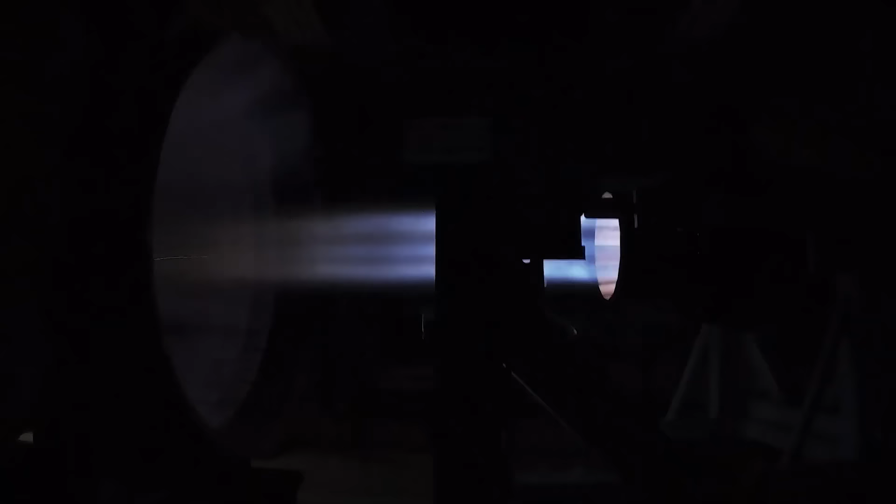AJ mentioned energy production and energy storage being two key technologies that could make their technology more accessible. And that's because one of the largest costs associated with a flight is the cost of fuel.

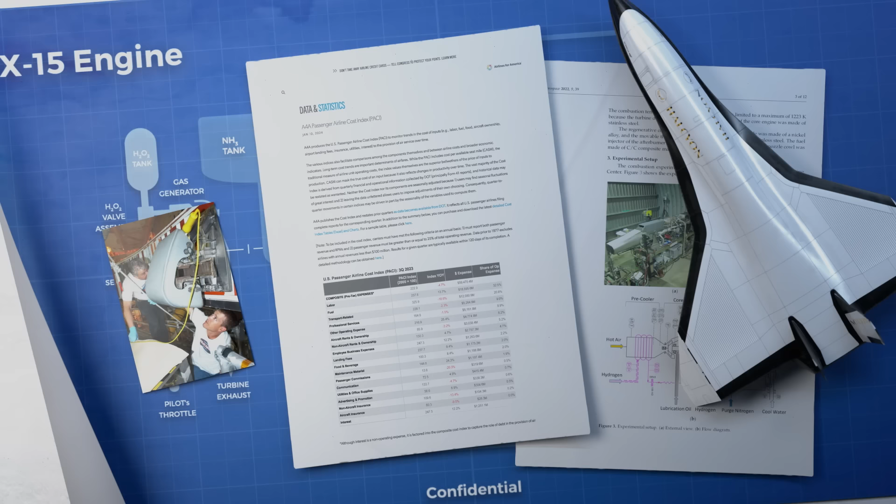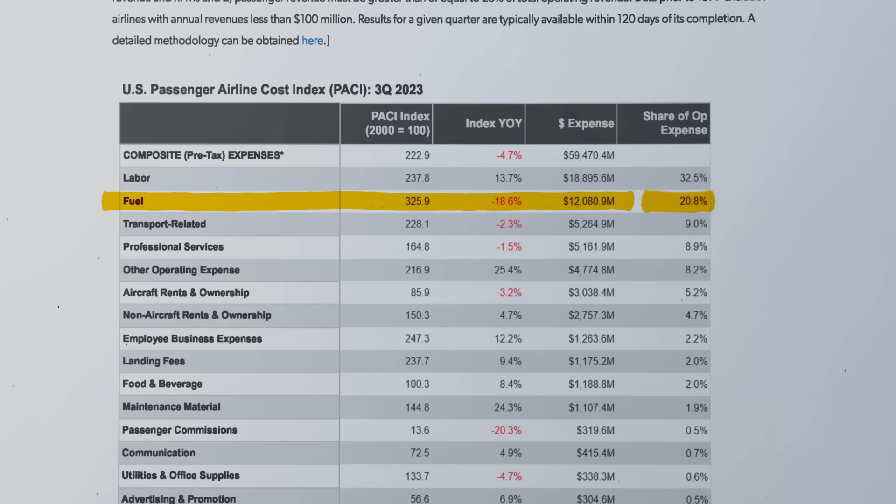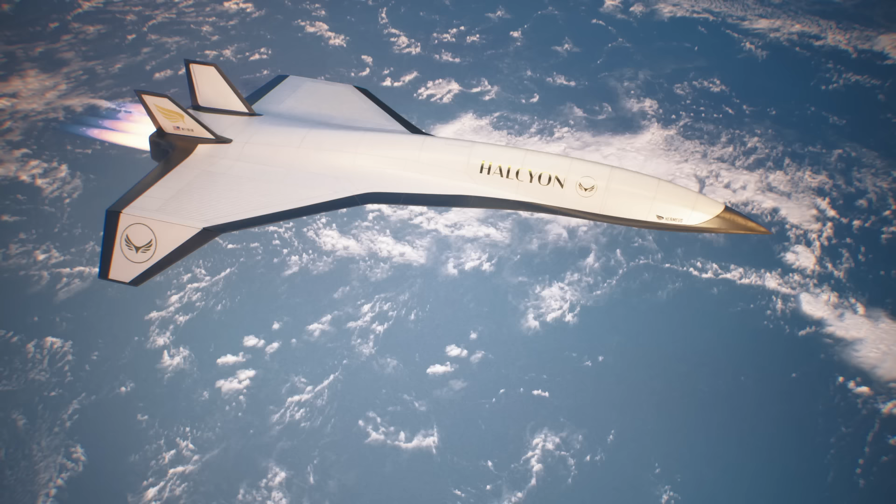Ignoring profit margins on a $100 ticket, we can break down where your money goes to cover the costs of an airline. On average, about $19 to $21 goes to fuel, fluctuating with fuel prices. For a hypersonic plane, that fuel cost is going to be much higher, as drag increases with the square of the velocity, although that will be mitigated somewhat by much lower air densities at a cruising altitude three times higher than a typical airliner.

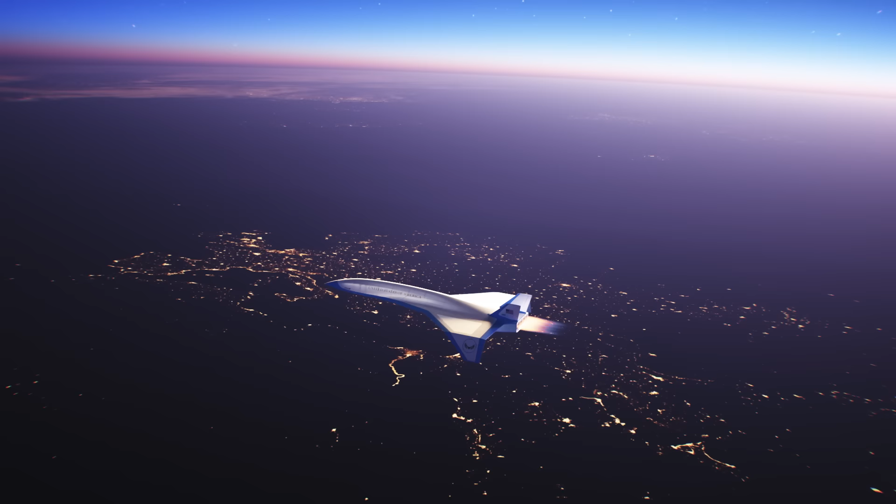Regardless, these aren't going to be cheap tickets, and that's going to be compounded by Halcyon's relatively small internal volume and the increased cost of maintenance for a plane dealing with extreme aerodynamic heating each and every flight. The reality is, Hermeus won't be selling these planes to commercial airlines anytime soon. Perhaps one day we will see a hypersonic Air Force One, allowing the President of the United States to appear first on the scene when it matters most, a powerful diplomatic tool.

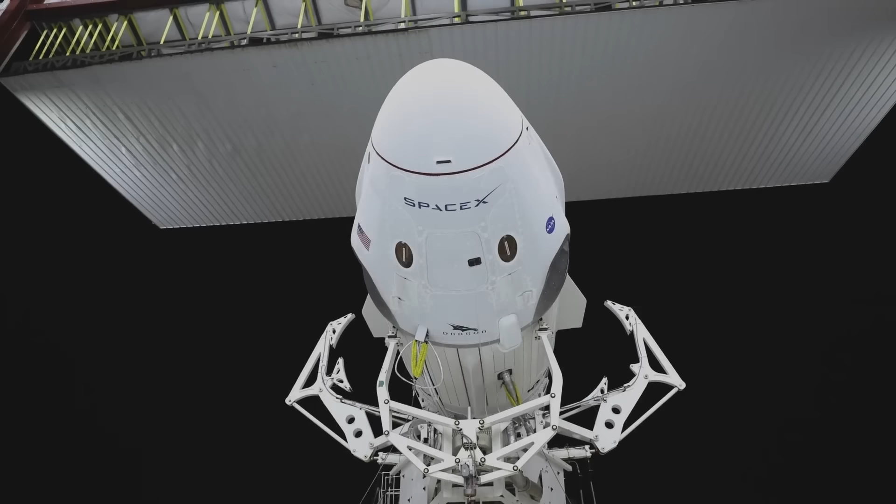I often judge companies by the people working within them, and it's hard not to get invested in the vision of these companies when people like Tonio Martinez are leading it, Hermeus' VP of production. Tonio is among the most experienced engineers in the world in his field, having worked on the X-51 Wave Rider, the SpaceX Crew Dragon, and Divergent's 3D printed supercar.

Experience he is bringing to developing the machine that builds the machine, where he is focusing much of his effort on ensuring everyone in the company is communicating and learning from each other. Not a lot of engineers get the opportunity to work with both the engineering process and the actual manufacturing process. So what is that like, developing that?

That's a good question, because a lot of companies are much more siloed, where engineering and manufacturing oftentimes aren't even in the same building. And so that was a very important part of establishing this company, was having engineering and manufacturing in the same building. And what that allows for is the engineers, as they're designing their parts, can come out and work with the technicians who will be putting things together and say, what about this, what about that? Make sure that the things can actually be assembled.

And the same thing with the machine shop. A design engineer has to get a part made. They can go out and talk to the machinist who's going to make their part, and get pointers on, like, use this cutter and make it that radius, these types of things that the engineer may not just intuitively know, but they can get that information from the technicians to make their designs that much better to begin with.

And then when the parts get made and they're actually integrating the parts onto the vehicle, you'll see the engineers and the technicians working side by side to integrate those parts and put them in. And so the engineer gets the opportunity to go through that process of, I designed this thing and this is what I was thinking when I designed it, in terms of how this thing could go together and ease of installation and those kinds of things.

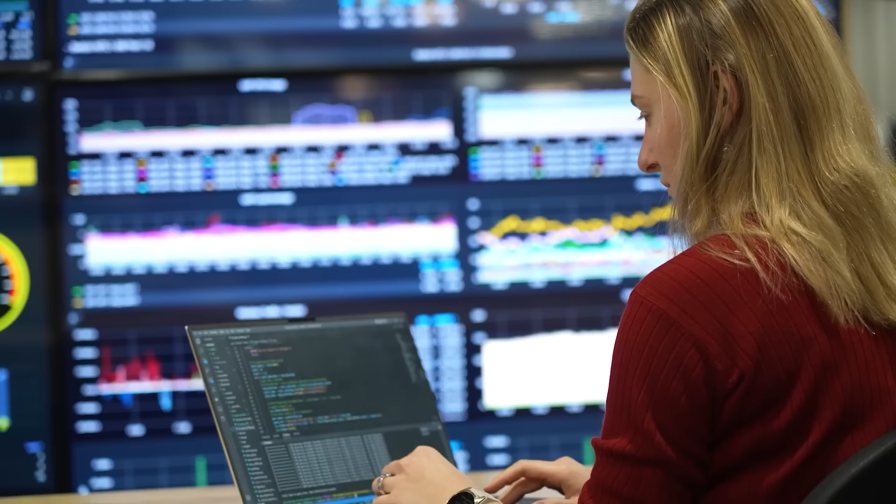Now, I know for a fact that any engineer listening to that conversation has their heart pumping a little bit faster. So many companies pigeonhole their engineers into ever-increasing specialization, to the point that it's hard to see the forest for the trees, and you just stop learning and evolving. Every ambitious engineer wants to work in a company like this, where your creativity is not only enabled, but encouraged. And in a company with people as experienced as Tonio Martinez, you are going to learn a lot.

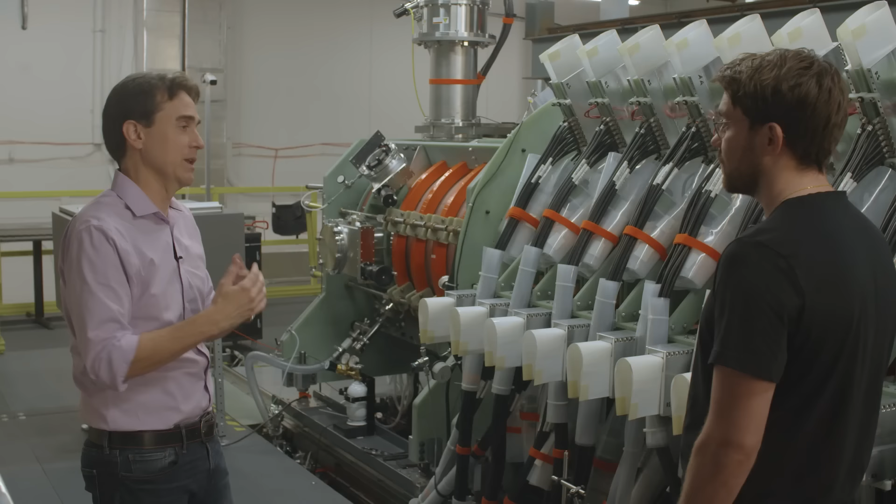I realized the opportunity I had to connect enthusiastic young engineers to companies like this last year. Helion told us, after our documentary with them last year, they actually hired a specialized nuclear engineer because of our video. I feel incredibly proud that our work can serve both our audience and help develop new technologies, and I want to take that to the next level.